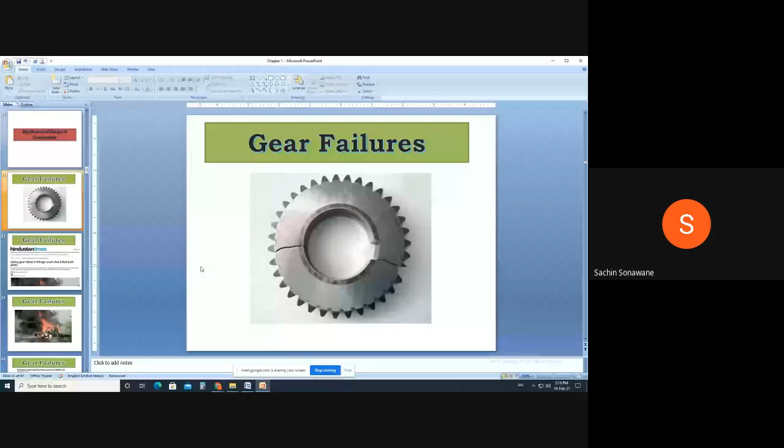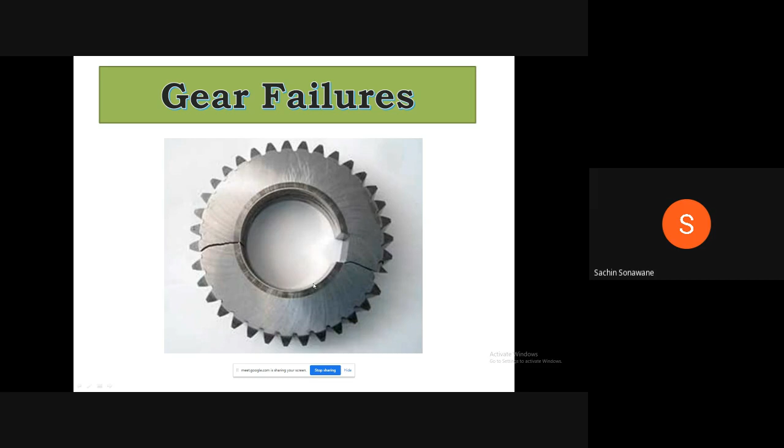There may be different causes of this gear failure. There may be improper material distribution, or improper material selection, or whatever thickness of the gear is provided may be less as compared to the standard one. Therefore these are the different causes of gear failure.

Now next, this is the article which was published in Hindustan Times. The title of the article is Safety Gear Failed in Mirage Crash That Killed Both Pilots. You know that aeroplanes are there. These are fighter jets, Mirage, Tejas. These are fighter aircraft. In these aircraft, a gearbox is present.

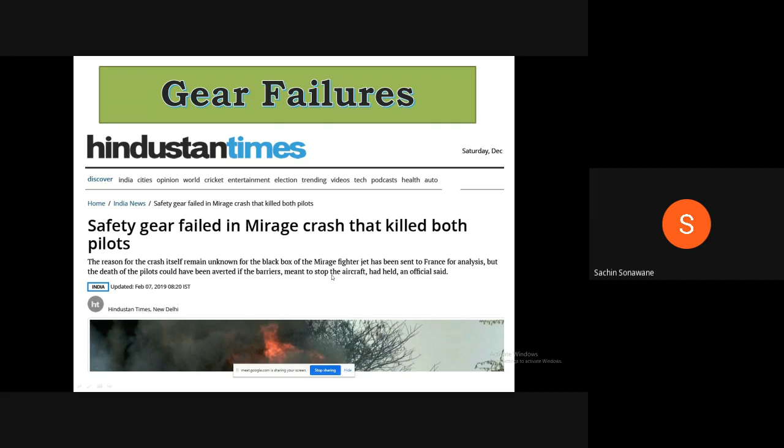Sometimes, if the safety gear fails, then the aircraft collapses, and because of that these pilots are also killed, and the aeroplane is also crashed. Therefore, this is nothing but the importance of design. Now you are observing this crashing of a fighter aircraft.

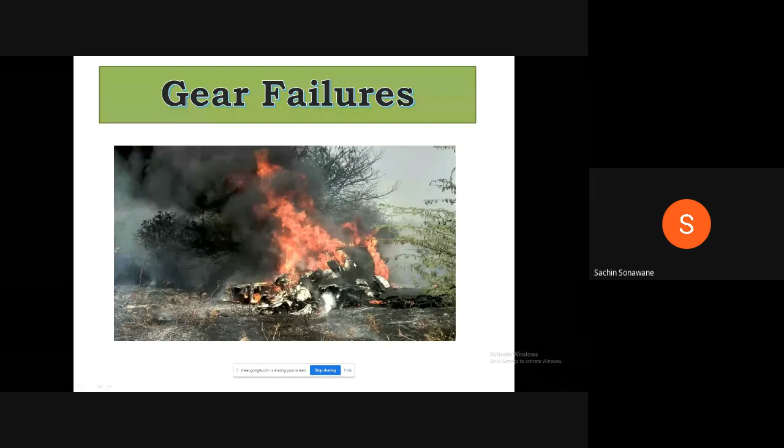Means because of this failure of the gearbox, the Airbus helicopter crashed, and because of this all 13 people on board lost their lives. Therefore, this is nothing but the importance of design, or significance of proper design.

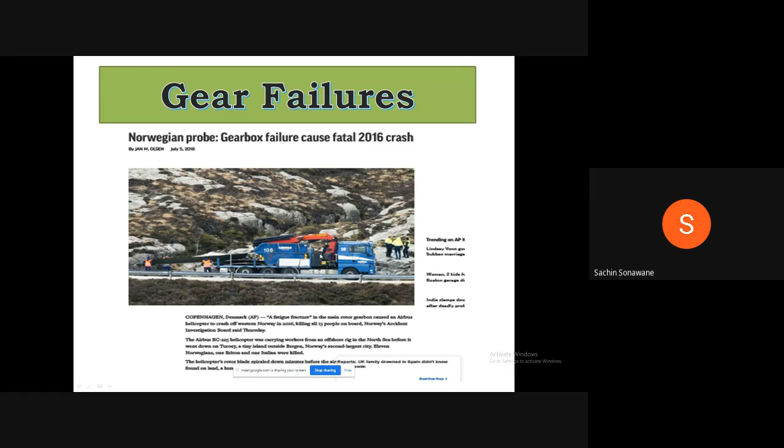Now next, pressure vessel failure. What is meant by pressure vessel? You know the gas tankers we observe on the road: gas tanker, petrol tanker, diesel tanker, milk tanker, water tanker. Also while going to Solapur, in Pakni, you observe various types of vessels. Hindustan Petroleum or Bharat Petroleum stations are there where petrol and diesel are filled in tankers. While traveling on the road, you observe very big vessels in Pakni.

Those vessels are nothing but pressure vessels. Why is it called a pressure vessel? Because whatever liquid or gas or fluid, fluid means liquid and gas, is filled in the tanks is filled under pressure; inside that tank some pressure is there, which may be less or greater than atmospheric pressure. The fluid is filled in the vessel under pressure, and that's why it is called a pressure vessel. Now, a boiler is also one type of pressure vessel.

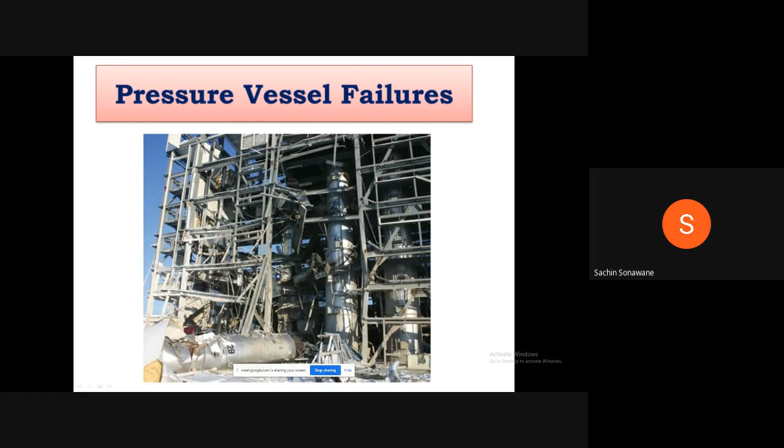You are observing in this figure that there is a failure of the pressure vessel. See, this pressure vessel has failed. There are different causes of pressure vessel failure, same as here, like improper material selection. Also, in case of pressure vessels, mainly welding is used to connect different plates or sheet metal to each other. Therefore, if failure of that welding takes place, definitely failure of the pressure vessel will take place.

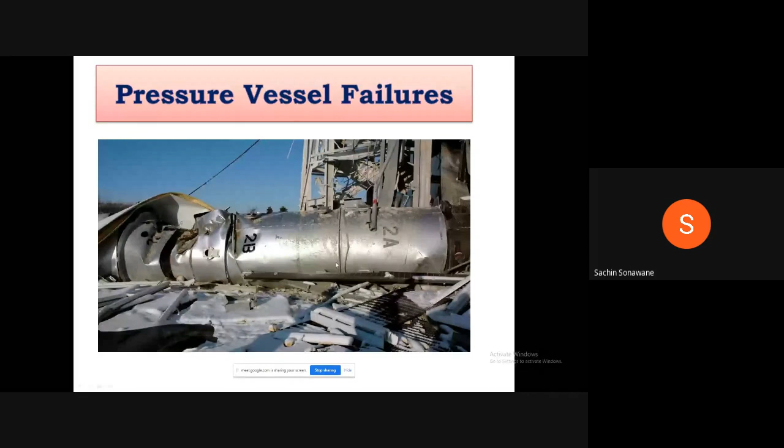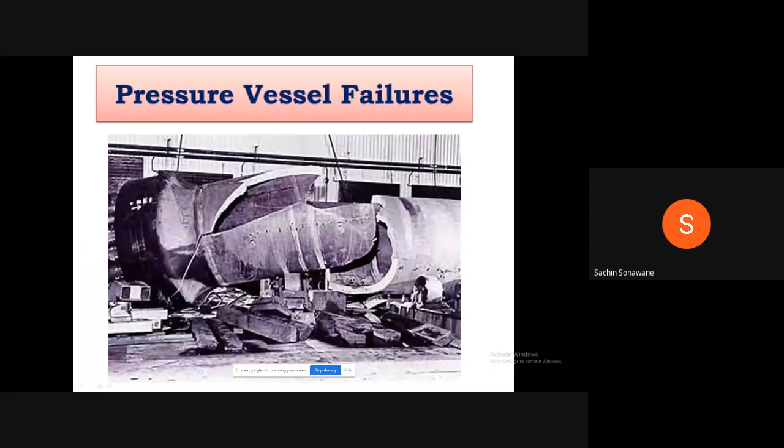See, this is the enlarged view. This is the failure of the pressure vessel. Same case is here. This is the failure of the pressure vessel. Therefore, what is the importance of design? Why is design important? If we design properly, then the life of the component will increase, and we have to take into account safety measures also.

Now, before starting the first chapter, again I will tell you, there is one point in machine design which you have studied, that is nothing but factor of safety. Depending upon the factor of safety, the life of the component is either increased or decreased. Now, you may know that you are sitting on the bench, and that bench plywood has some thickness.

Therefore, suppose 10 thickness plywood is used, and 3 students will sit on the bench. Therefore, that bench will carry the load of 3 students. If I decrease the plywood thickness to 5, what will happen? Suppose 3 students of 60 kg each sit, therefore 180 kg total load will be there on that plywood. Therefore, that plywood will fail.

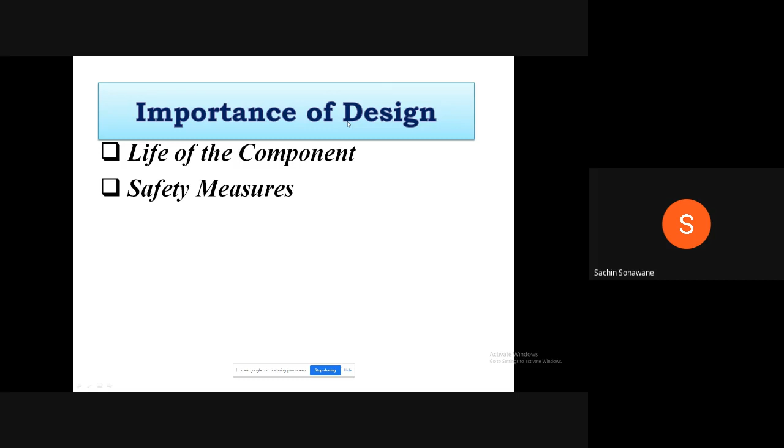Now, we will start our chapter number 1 or unit number 1, spur and helical gears. First of all, we will see spur gear. Its content is design considerations of gears, gear materials, types of gear tooth failures, hunting tooth, gear tooth loads, minimum number of teeth, face width, Lewis equation, Spott's equation, Buckingham's equation, gear design for maximum power transmission, introduction to AGMA code, and helical gear, virtual number of teeth, force analysis, beam and wear strength, effective load on gear tooth. This is the syllabus of the first chapter.

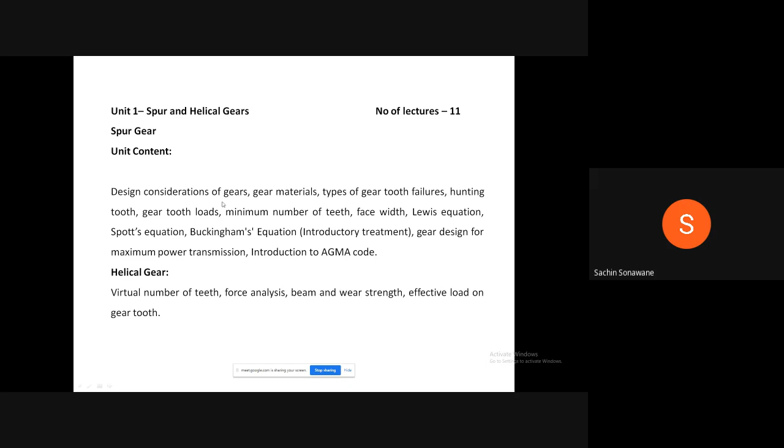Now, I will not directly start design considerations of gears. First of all, we will see some preliminary theory of gears, that is, what is meant by gear, its advantages, limitations, types of gears. Then we will see some gear terminology, because it is not covered in any chapter or syllabus you have studied. Therefore, first of all, I will take some introductory part. Only then will you understand the future things. Therefore, first point, spur gear.

Now, all are saying that gears are used to transmit power. Yes, it is correct, but this is not the definition of gear. Definition of gear is, if teeth are provided on the circumference of a disc to transmit motion and power, then it is known as gear. Means, how are you identifying the gear? If there are teeth on the periphery of the disc, then it is known as gear. And this is spur gear.

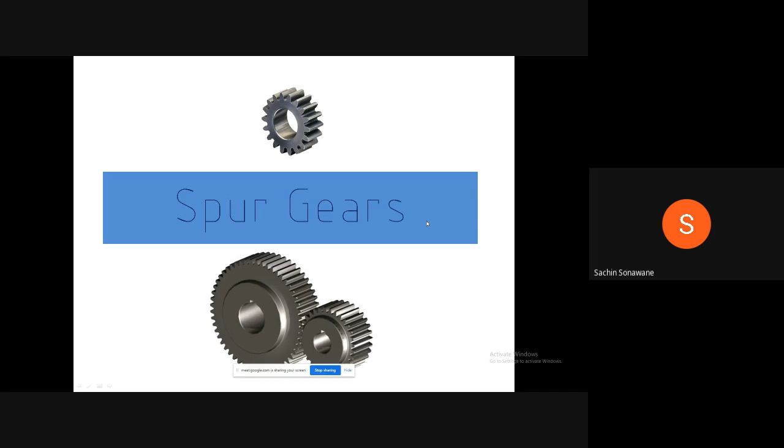Now, introduction. Again, that definition of gear is there. Any toothed member designed to transmit motion to another one or receive motion from it by means of successively engaging tooth is called a gear or toothed gear. In general, we are saying gear only, because if gear is there, then there will be teeth on the periphery of the disc. Therefore, a gear is a toothed wheel with teeth cut on the periphery of a cylinder or

a cone. Teeth of one gear meshes with teeth of the other gear. Hence, it is called a mesh drive or positive drive. Why is it called positive drive? Because there is no friction or there is no power loss. Whatever exact velocity ratio, it is transferred from one shaft to another shaft, and that's why it is known as positive drive.

Or there is no slipping phenomenon. You know, in case of belt drive, creep and slip phenomenon is there. That does not exist in case of gear drive. That's why gear drive is known as positive drive, because of no loss of power or motion due to friction. It is preferred when medium or larger power is to be transmitted. Rotation of one gear will cause rotation of the other in the opposite direction.

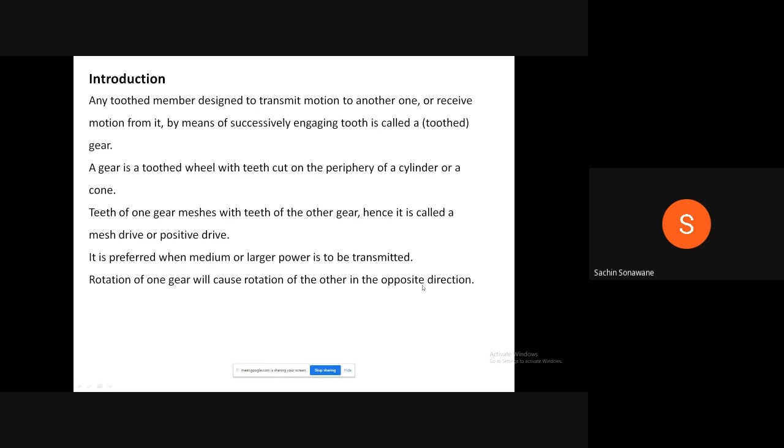Now, what are the advantages of gears? Gears offer the following advantages. First, compact drive on account of small center distance. Second, high efficiency, reliable service, and simple operation. Third, positive drive due to negligible slip between contacting surfaces.

Fourth, give higher speed ratio and can transmit higher power. Fifth, it is possible to transmit power between parallel, non-parallel, intersecting and non-intersecting shafts. And sixth, power can be transmitted at higher speeds.

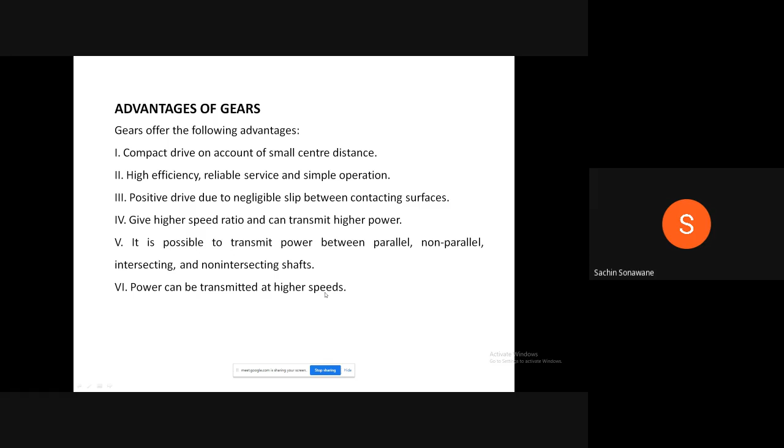Now, limitations of gears. The limitations of gear drive are: first, the error in tooth meshing may cause undesirable vibrations and noise during operation. Second, costlier than belts and chain drive, because manufacturing of the gear requires special machines and tools which are costly. Third, power cannot be transmitted over long distances. Fourth, precise alignment of shafts is required. Fifth, require continuous lubrication.

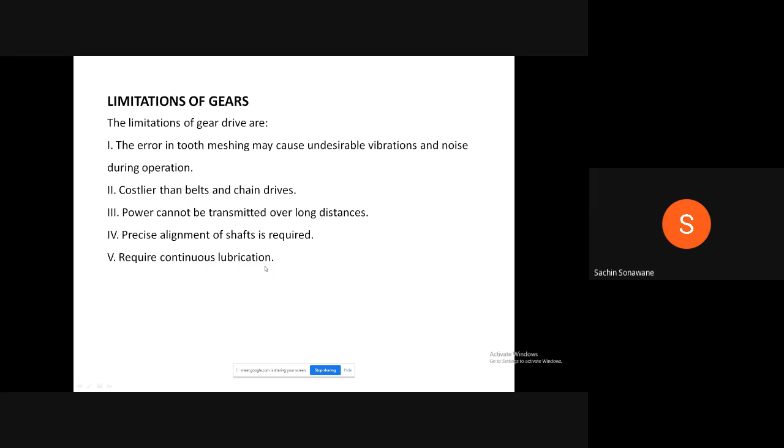Applications of gears. The gear drive has wide applications in the following fields. First, metal cutting machine tools. That is, you may have seen gears in lathe machine, milling machine, shaping machine, in planing machine. Whatever machine tools are there, or in case of drilling machine also, you will find gears.

Second, automobiles. Automobiles, you know, our two wheelers are there, four wheelers are there. In case of four wheeler, trucks are there, then aircraft, helicopter. Everywhere you will find gear drive is there. Then tractors. Then fourth, hoisting and transporting machinery, that is material handling equipments. In case of material handling equipments, worm and worm wheel drive is used because it is having high speed reduction.

Then rolling mills, then marine engines. That is, in case of ship also, gears are used. That is, gear drive is used in case of ship also.

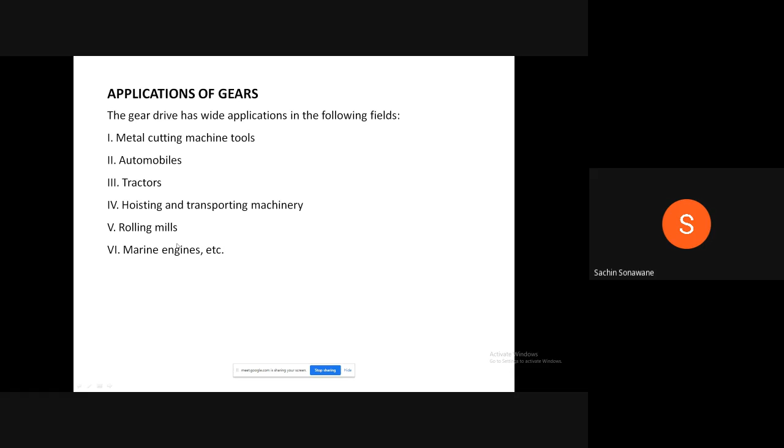Then next, classification of gears. Now, gears are classified according to how they are transmitting the power between the two shafts. Now, first is parallel shafts. In case of parallel shafts, gears are classified as spur gear, helical gear, double helical gear, and herringbone gear. Double helical gear is also known as herringbone gear.

Then gears can be used to transmit motion and power between two intersecting shafts. In that, four gears are there, that is straight bevel gear, spiral bevel gear, zerol bevel gear, and face gears. These all four types are of bevel gears. Bevel gears are used to transmit motion and power between two intersecting shafts.

Then non-parallel, non-intersecting. In that, spiral gears, hypoid gears, and worm gears. Therefore, this is nothing but overall classification of gears. Again, there are classifications according to the position of teeth. That is, if teeth are parallel to the axis, it is known as spur gear. If the teeth are inclined with respect to axis, then it is known as helical gear. If the teeth are of spiral shape, it is known as spiral gear.

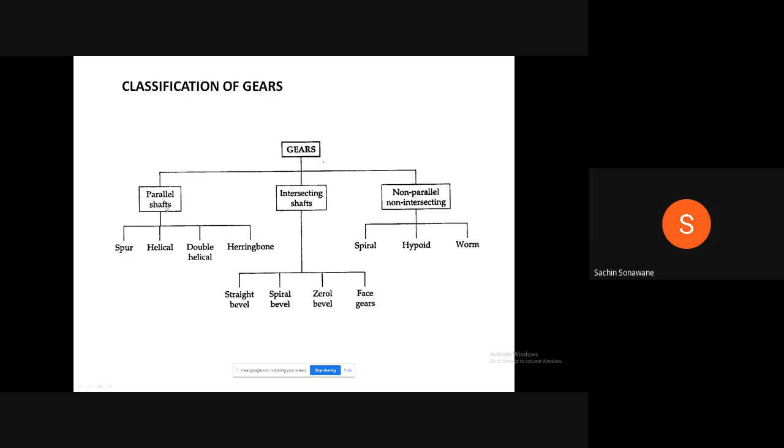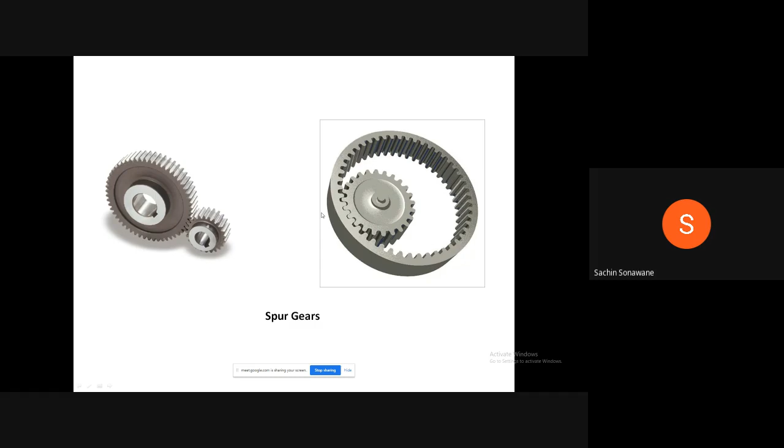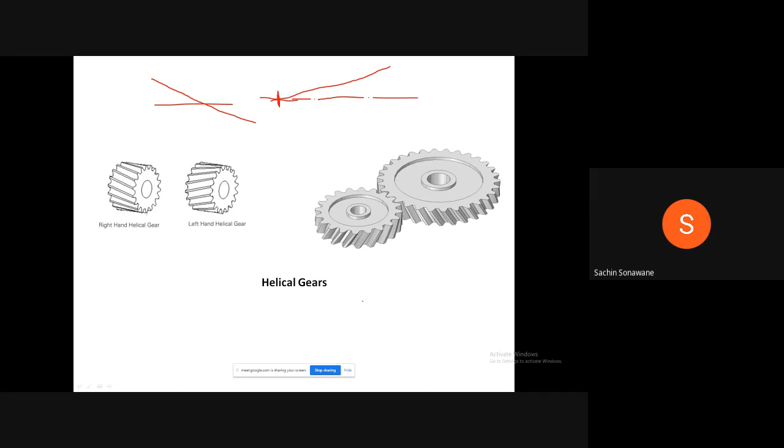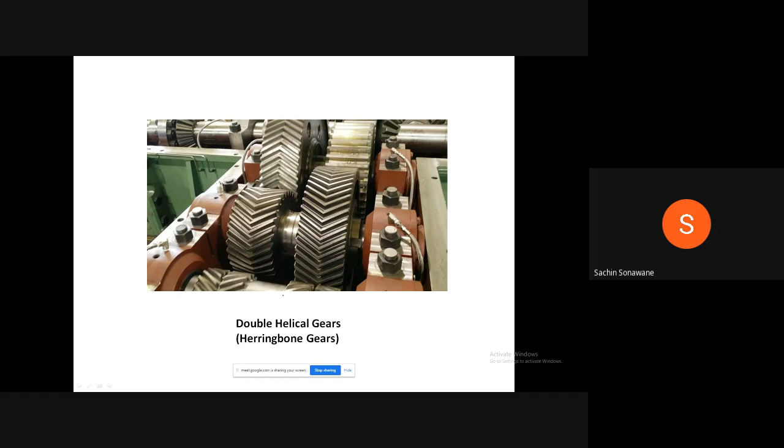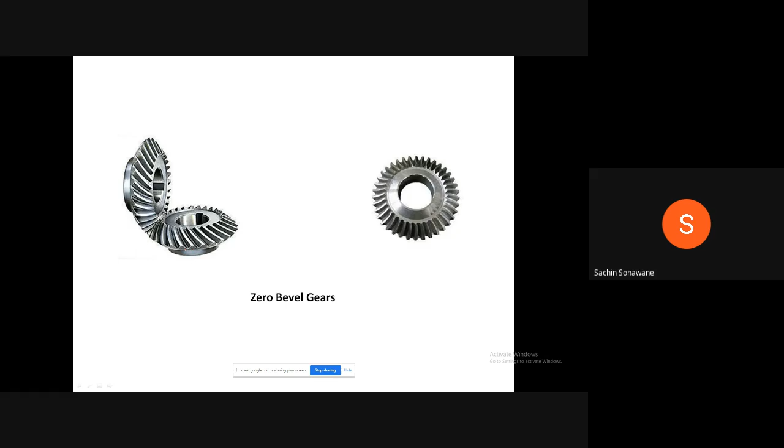If you will see, teeth are not straight, but they are not spiral shape also. That's why they are known as zero bevel gear. What is the use of zero bevel gear? When I teach the bevel gear chapter, at that time again I will explain what is meant by straight bevel gear, spiral bevel gear, and zero bevel gears.

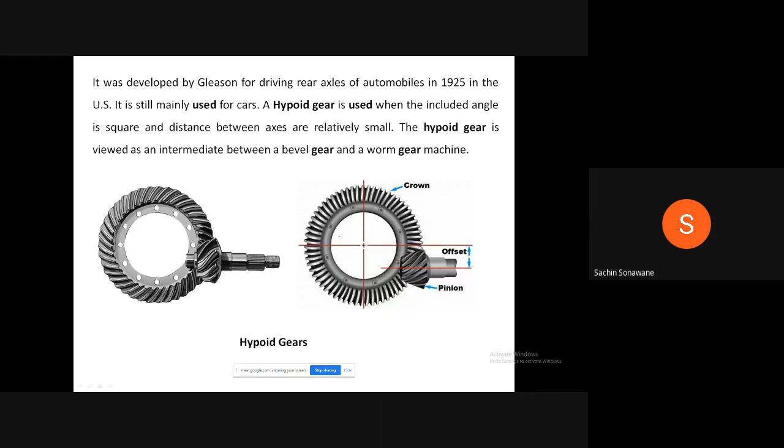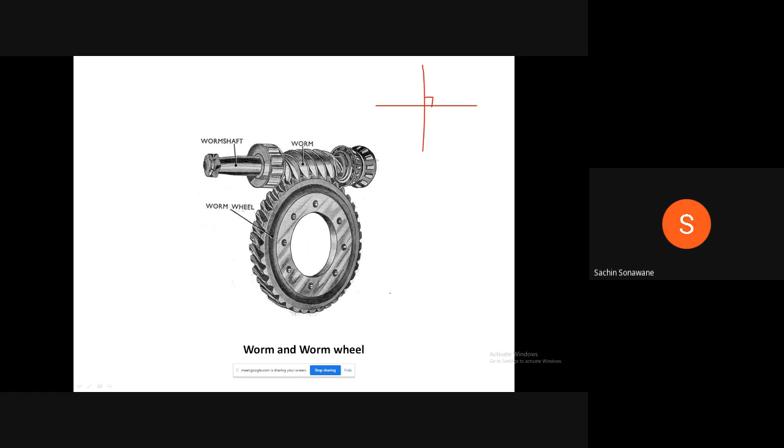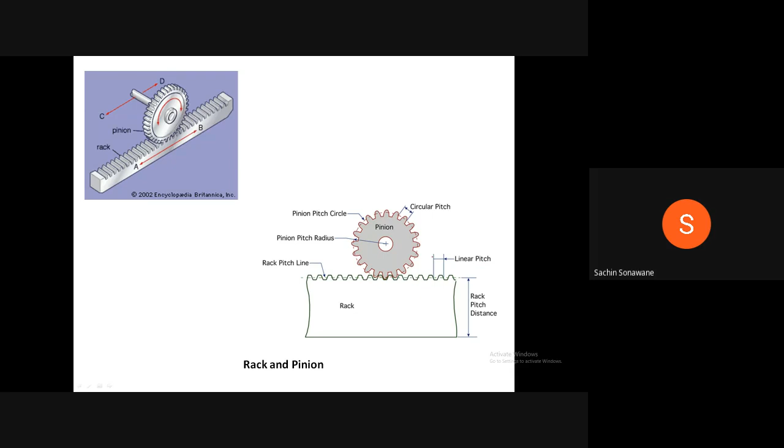And this is the rack gear, also known as straight gear, which has infinite pitch circle diameter. This middle line is known as the pitch line of the rack, and this is known as linear pitch because it is a linear distance. Why is the other one called circular pitch? Because if you connect these two points, it will look like an arc, and an arc is one part of a circle. That's why this pitch is known as circular pitch. This distance is a linear distance, that's why this pitch is known as linear pitch. Therefore, this is rack and pinion.